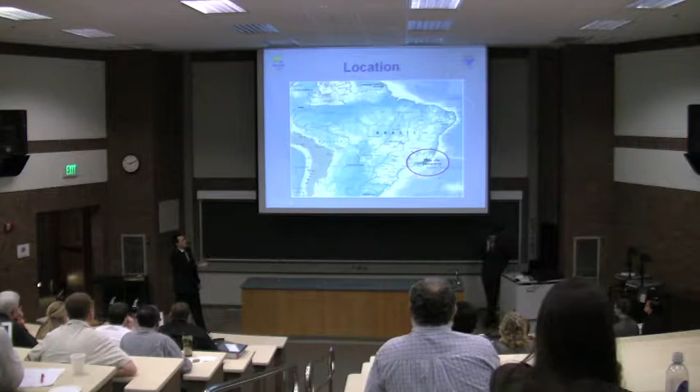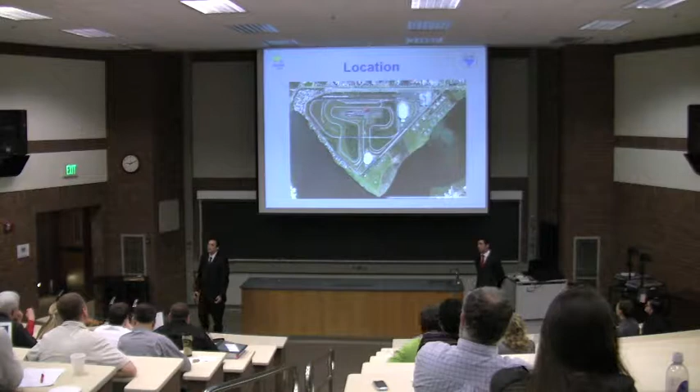The city is going to have 4 sites of competition: the Barra Zone, the Copacabana Zone, the Maracanã Zone, and the Deodoro Zone. The tennis competitions will be played in the Barra Zone. Inside the Barra Zone, there are going to be many venues for competitions. The Olympic Tennis Center will be located in the Rio Olympic Park. The Rio Olympic Park is going to be constructed on the shore of the Jacarepaguá Lagoon, where nowadays there is a racing track. This vision model, given by the Brazilian Olympic Committee, shows the venues inside the Rio Olympic Park, with the Tennis Olympic Center right on the shore of the lagoon.

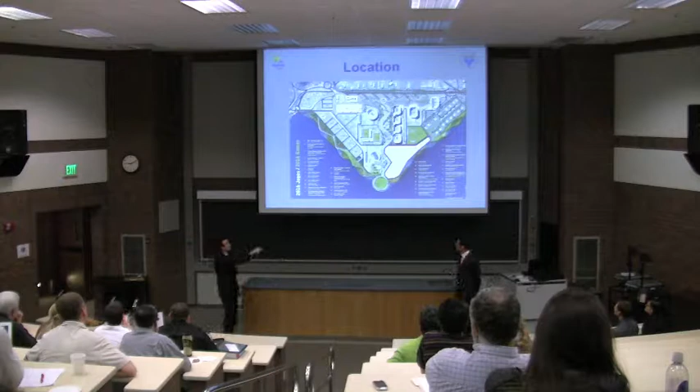Although the Olympic Tennis Center has 3 stadiums and 13 ground courts, the objective of this project is to develop the structural design of the center court stadium only, taking into consideration mainly safety, aesthetics, and economical characteristics. The stadium must have 120 feet by 60 feet clear space at the center, which is the minimum area needed for the court.

It's also required by the Brazilian Olympic Committee that the stadium must have a capacity for at least 10,000 seated spectators. Regarding the structural analysis and design part, our steel frame design followed the provisions given by the American Institute of Steel Construction. Our concrete frame design follows the ACI Code 318, which is given by the American Concrete Institute. And our loadings are based on the International Building Code and the ASCE 7-05 Code, which is given by the American Society of Civil Engineers.

The Brazilian Olympic Committee defined a budget for the construction of the entire Olympic Tennis Center, but they did not specify how much of that money would be directed to the construction of the center court stadium only. Therefore, we analyzed several different aspects of the facilities, such as their capacity and importance for the games. And we also got information from Brazilian specialists in stadium construction, and we came up with a budget of $25 million for the construction of the center court stadium only.

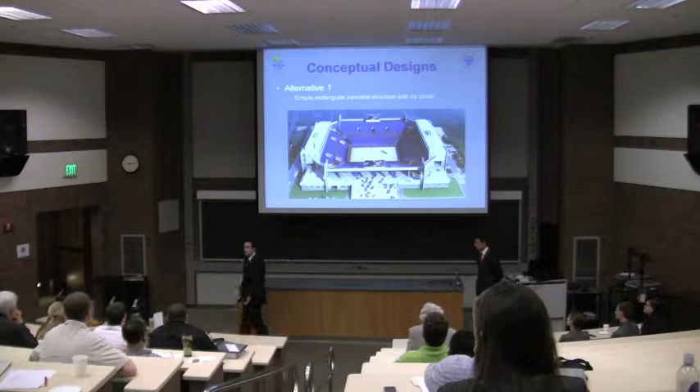After the problem statement was defined and the limitations and constraints were stated, we generated 4 conceptual designs in order to find the best design to go with in our project. Alternative 1 is a simple rectangular concrete structure with no cover for the stands or roof for the court. Alternative 2 is a rectangular steel structure with rounded corners, concrete grandstands, a partial cover for the top level of seating, and an external illuminated glass finish on the outside of the stadium.

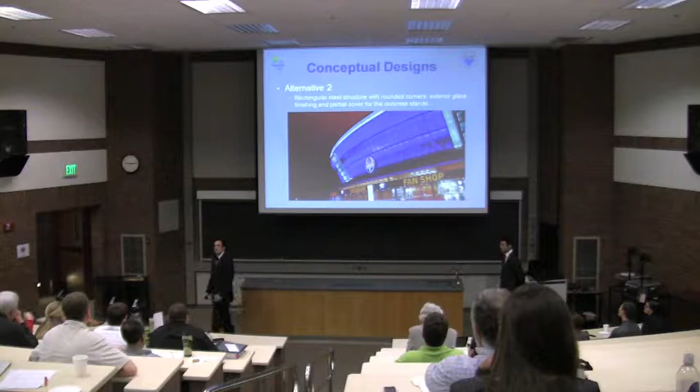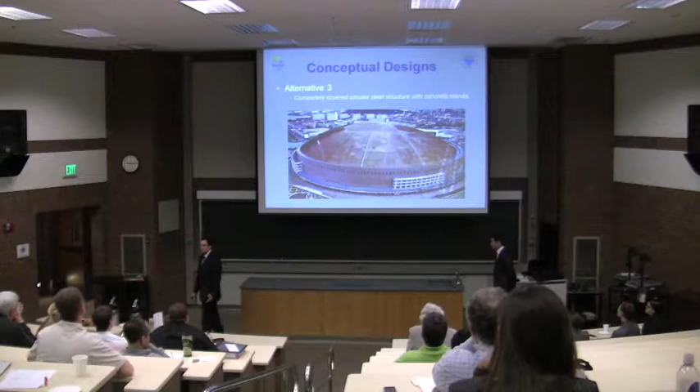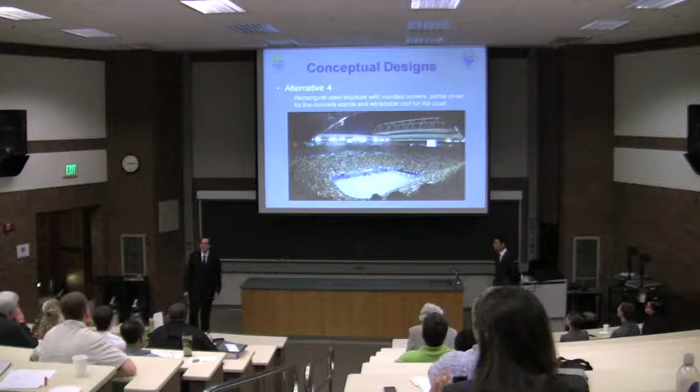Alternative 3 is a completely covered circular steel structure with concrete grandstands. Alternative 4 is a rectangular steel structure with rounded corners, concrete grandstands, a cover for the top level of seats, and a retractable roof that can be closed in 20 minutes in case of rain or strong winds. In order to compare the alternatives, we generated a table with the characteristics of all the alternatives. This table has characteristics such as shape, stands material, cover, cost, maintenance cost, and many others.

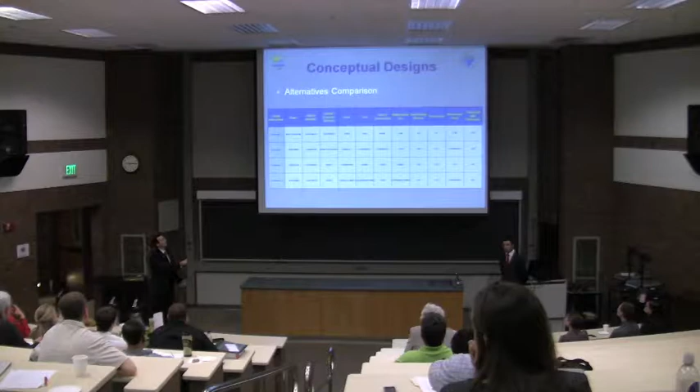In order to find the best design to go with in our project, we made a decision matrix where we rated the design goals from the most important to less important, giving a weight factor for them. In each design goal, we rated the alternatives from 1 to 4, 1 being the worst and 4 being the best for that design goal. Then, we multiplied the value from 1 to 4 we gave in each design goal with the relative weight factor we gave for the goal in order to get a final result for each alternative. The decision matrix shows us that alternative 2 was the best one to use in our design. It got a value of 1,740.

Then, using a software called Autodesk Maya 3D, we generated an architectural model of the entire complex using alternative 2 as the center court stadium.

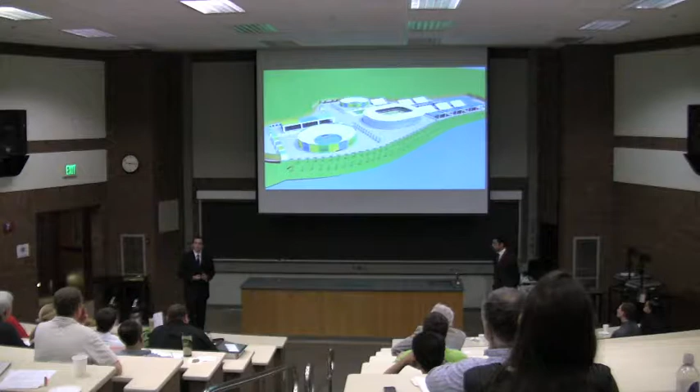The Brazilian Olympic Committee proposed the Olympic Tennis Center to have a center court stadium with a capacity for 10,000 seated spectators. A Court 1 stadium with a capacity for 5,000 seated spectators. Fast food concessions and stores for the public to have comfort while they're watching the games. A Court 2 stadium with a capacity for 3,000 seated spectators.

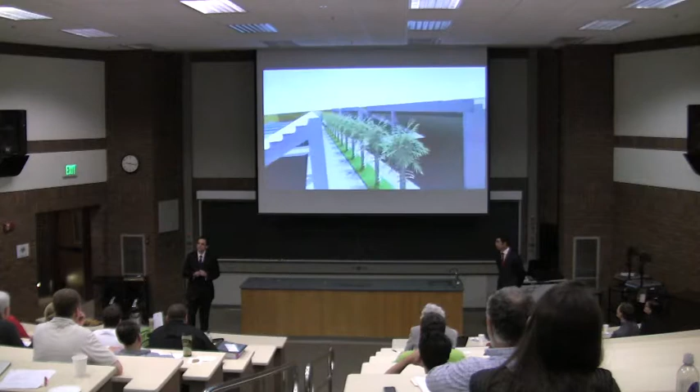The less important games of the Olympics are going to be played in 6 ground courts that have a capacity for only 250 people. Finally, the complex also has 7 practice courts for the players to practice before the Olympics start and for them to warm up before their games in the Olympics. As it was said before, the Olympic Tennis Center is located right on the shore of the Jacarepaguá Lagoon.

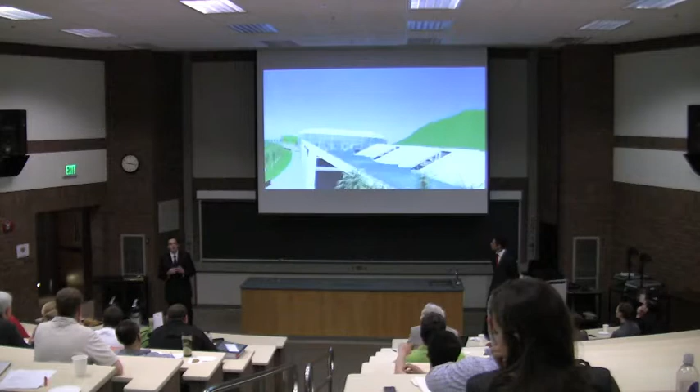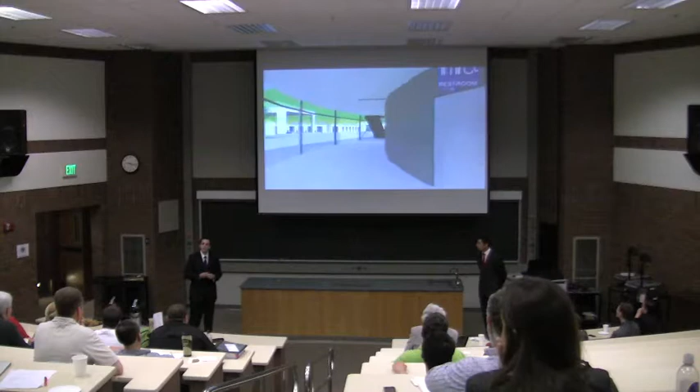The service area of the center court stadium has mainly 3 floors. The public will access the stadium through the doors in the glass and then walk through the corridors in order to get to their seats. The first floor is focused on the players. It has the players' locker rooms, trainers' room, press conference room, and press mix zone.

It also has restrooms and concessions for the public, but the public will have to go through stairs and elevators to get to the 2nd and 3rd floor in order to get to their seats. The 2nd floor has the access for the media center, for the media journalists to broadcast the games to the world. The 2nd and 3rd floor have concessions and restrooms all around for the public comfort. In order to get to their seats, the public will have to go through 12 corridors, 6 located in the 2nd floor and 6 located in the 3rd floor.

In order to get to the capacity needed for the stadium, we generated a capacity calculation that gave us the value of 30 rows needed in the grandstand in order to get to 10,000 seats. We divided the 30 rows into 3 sections. The first section with 5 rows of blue chairs, the second with 10 rows of yellow chairs, and the third with 15 rows of green chairs. The media center is going to be located in between the 2nd and 3rd level of seating, behind the dark tinted glass for them to broadcast their games in their press box.

The 3rd level of seating is protected by the aluminum cover, which is supported by a system of steel trusses. The steel trusses are supported by the exterior columns of the stadium. The final height of the stadium was calculated to be 72 feet tall, due to the rise of the steps to the grandstand, the floor for the media, and the safety height needed for people not to access the truss. The top view of the model shows the distribution of the courts in the Tennis Olympic Center.

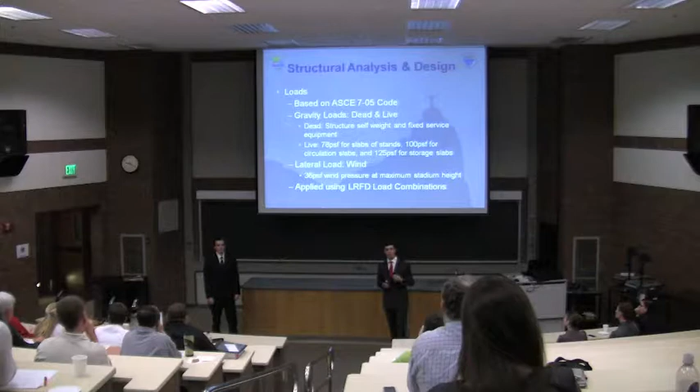The code specifies a live load of 60 PSF for the stands area, 100 PSF for the circulation areas, and 125 PSF for the light storage areas. We further increased the 60 PSF load for the stands area by 30% to account for impact loads that might be caused by the spectators. And that's why you see the 78 PSF value in this slide. The code also has a procedure to calculate the wind pressure that must be considered. Therefore, we performed all the calculations and we found that value to be 36 PSF at the maximum elevation of the stadium. Then, all those loads are applied to the analysis and design using the load and resistance factor design load combination.

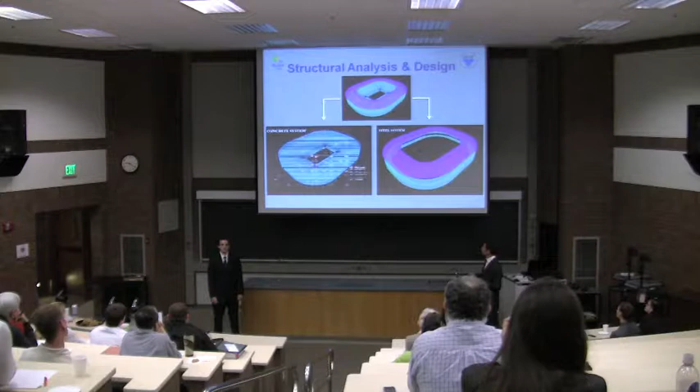So take a closer look at the concrete system. In this figure, all the beams are represented with a letter B and a number, all the slabs with a letter S and a number, and all the columns with a letter C and a number. How the system works is basically the gravity loads are applied to the slabs, which transfer the loads to the beams, which then take them to the columns, which then take them to the foundation.

The steel system, on the other hand, receives both gravity and lateral loads. For the gravity load, there are two cases. The first one is the gravity load coming from the roof. That load is transferred to purlins that are connecting the trusses. So the purlins take the loads from the roof, take them to the trusses, which then take them to the exterior columns, which then take them to the foundation.

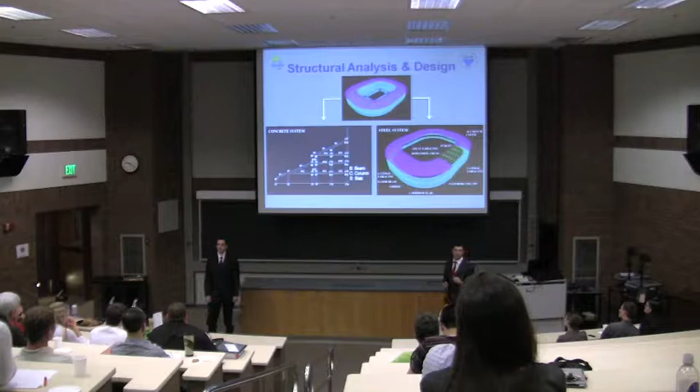The second case is the gravity load coming from the corridor slab. That load is supported by a system of floor beams, which are supported by girders. So the girders take the load and transfer them to the exterior columns, which again take them to the foundation. The lateral wind load is directly resisted by X-bracing systems that are symmetrically placed in both the short and the long direction of the stadium.

The concrete system design was performed by hand by taking into consideration the critical member of each group and then designing for that member and using that design for all the members in that particular group. One of our main concerns while performing the concrete system design was to find the optimum solution between the labor cost and material cost. Since labor costs are usually higher than material costs, we tried to minimize that as much as we could, although that might have increased the material cost at some point.

So in order to do that, we tried to use the same sections as much as we could, and when we had to change the section, we tried to maintain that as similar as possible to the one that we already had. We also limited the steel reinforcing bar numbers to 5 sizes only for the entire stadium.

The beams were all designed as simply supported, and they were designed based on flexure, shear, and deflection criteria. So, following the same logic, we defined all the beams to have rectangular cross-section, and once again, we limited the steel reinforcement bar sizes to 4 sizes only in this case.

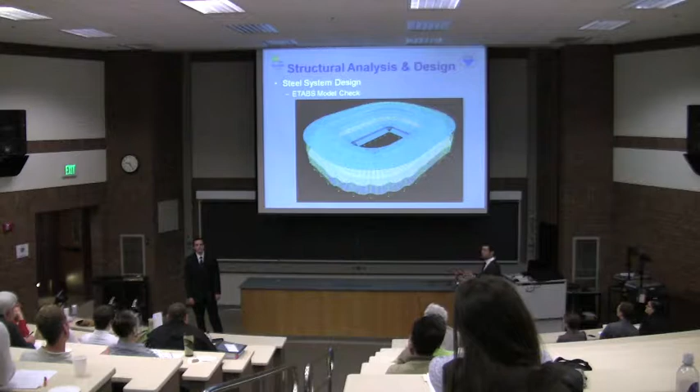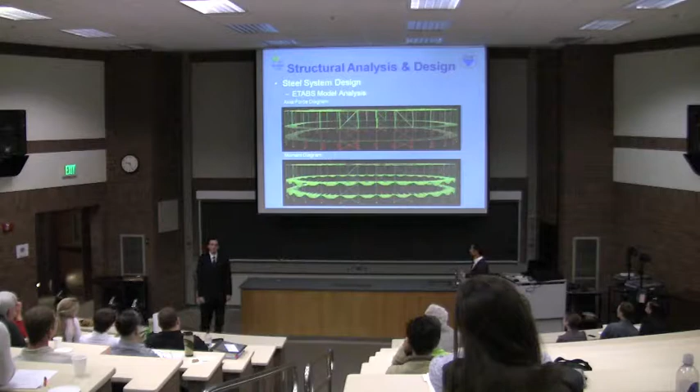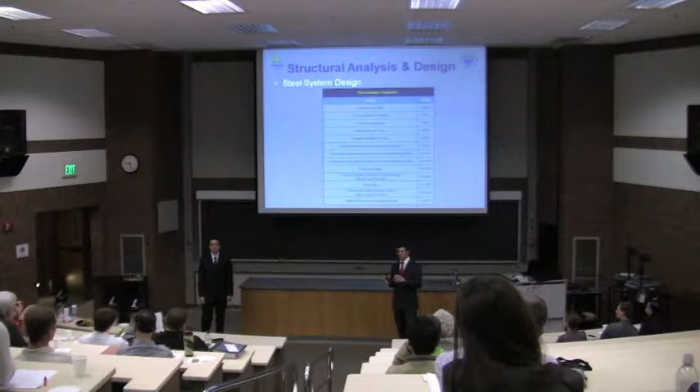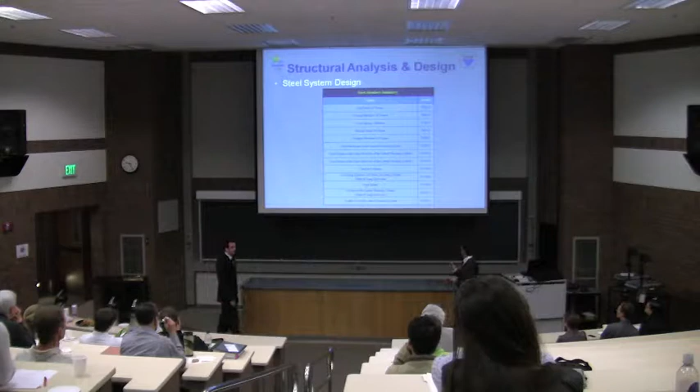So now that we knew the forces and we knew the stresses in each of those members, we then divided the steel system into 13 groups. And then we analyzed each member of that group, and we found the critical member for that particular group. So then ETABS gave us the smallest section that could be used for that member. Then we took that section and we used it for all the members in that particular group. So as you can see on the table, all the groups have only one unique section assigned to them, and they're all W sections.

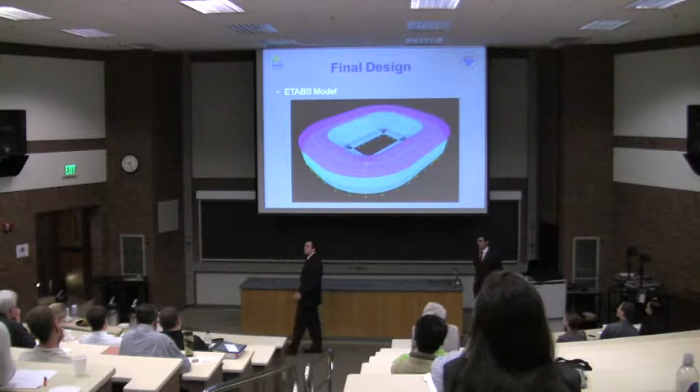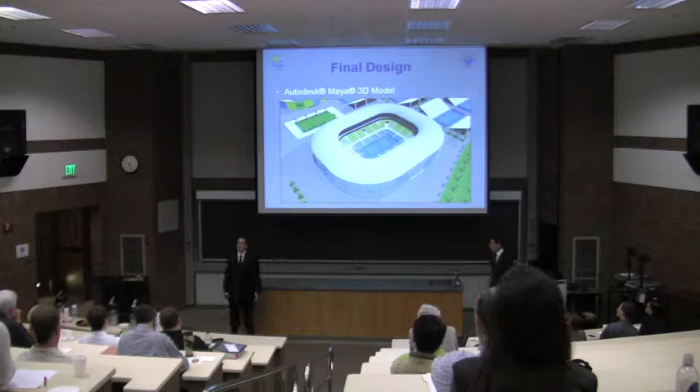The final model given by the ETABS software shows the concrete and the steel system working together. The final rendered image given by the Maya software shows the final architectural model of the center court stadium.

In order to get to the cost of the structure, we used the help of the Brazilian specialists in stadium construction. They are currently working on the stadiums for the Soccer World Cup that is going to happen in Brazil next year. To get to the cost, we needed to find the quantities of all materials in the stadium, member by member of the structure. After we found the quantities, we used the Brazilian prices for materials in order to get to a final cost of materials of around $8 million.

With the experience of the Brazilian specialists in stadium construction, we found out that usually in a Brazilian stadium, 45% of the cost of the structure is material cost, and 55% is labor cost. So we got a final labor cost for our structure of around $9.8 million. So the final price of our structure will be around $18 million.

To conclude our project, we found that the structure design is safe and complies with the required building codes. The final capacity of the stadium was found to be 10,568 seated spectators. The final cost of the structure was found to be $18 million, which is under the budget we have of $18.75 million.

The structural system is a combination of reinforced concrete and steel. And finally, we found that the stadium is feasible to be constructed by 2015. We found that with the help of the Brazilian specialists in stadium construction.

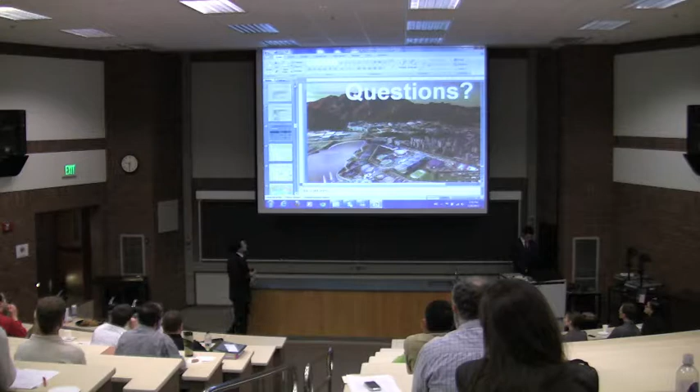So for the safety, the alternative one, since it doesn't have any cover or anything, we consider it being safer than the other alternatives, since the roof cannot fall onto people, so it's a safer structure, having less complexity on it. For example, the alternative 4, we found out that it might not be safe because of the retractable roof. It could catch on fire or something like that, so because of the mechanism, it could be less safe than

the other one. So it's not that the structure wouldn't be safe for people to use, it's just to consider the difference between each other, being less or more safe than the other. But all the designs will be safe, as in the structure is safe for people to use.

Now, public acceptance, how do you do that? Because the Olympics is in Rio de Janeiro, which is a city with nice weather, we think that the public will not accept a stadium that is completely covered. Because people like the weather of Rio and they like to enjoy having the sun and everything. So we thought that because of that, the public wouldn't accept.

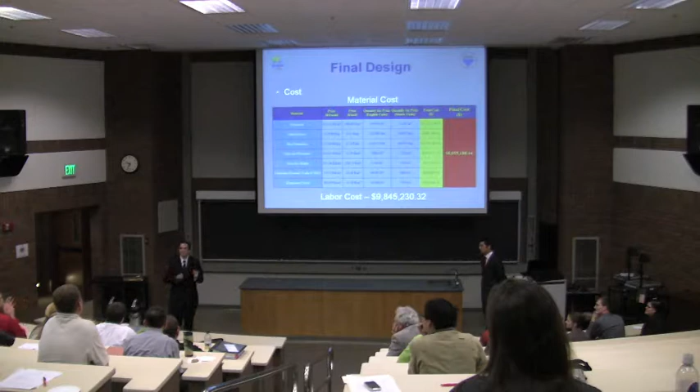You see, it is over $9 million and 32 cents. I mean, it's not possible that accurate. The material cost is exactly that cost. That's the cost of materials one by one. The labor cost, my point is that when you make the presentation, you have a figure like 9 million. You really don't want it to be 32 cents. Okay. This was based on the materials cost. That's why we did it, but I just said around 9.8 just to make sure.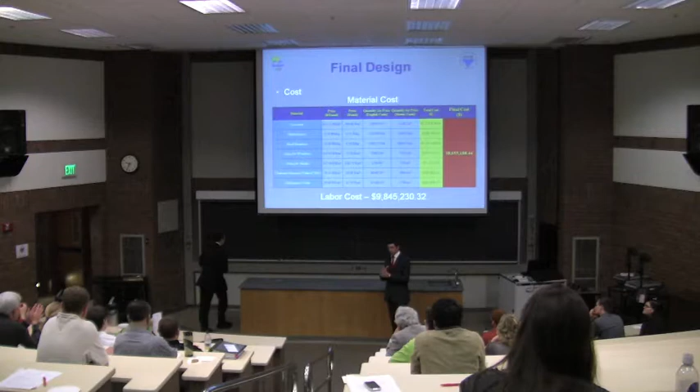Does the code have anything built into it, the fact that it's by the water? You have the wind load there based on elevation, but certainly the wind must be different. Yeah, based on the location. The code does take into consideration if it's an open area, what is around. And we have all the calculations actually for the wind load.

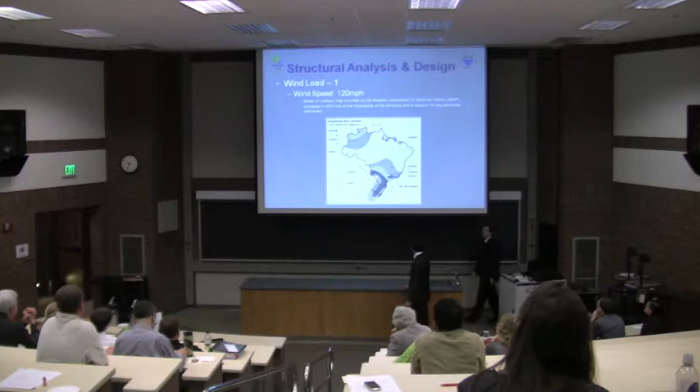And so it does take into consideration where your structure is located. So here, for example, first we found the wind speed in the region in Rio de Janeiro. Then you see all these factors, Kz, Kzt, Kd. These are all based on the code, and it varies depending on the location of the structure. It's an open area. It does not say specifically if there's water on the side, but it takes into consideration what it is.

Yeah, and my other question, does it do anything for material because it's by salt water or something like that? No, we did not think of that. The water here is not actually the ocean. It's a lagoon, so it's not as big as it's shown. Okay.

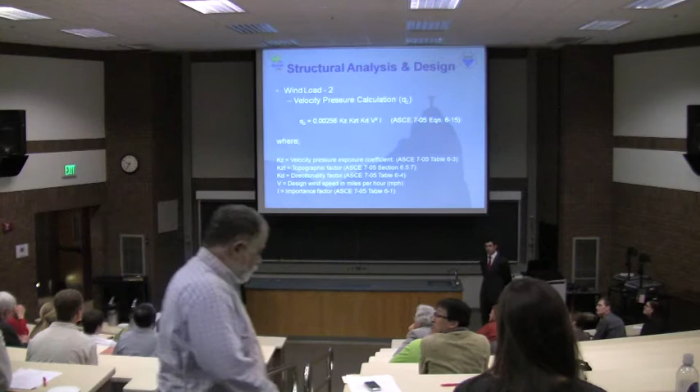Other questions? For the rendering software that you use, how did you learn that, and how much time did it take you to finish this? Well, I took an extra class besides my major here just to make the architectural model with Andres Montenegro. And it took around 6 hours a day, working 5 to 6 days a week to do the architectural model. And the animation took me at least 3 weeks of working 5, 6 hours a day with the Studio M crew.

Yeah, for that final budget, the first one you had in 2008 dollars for 25. Was that final one $18 million in 2008 dollars? Yeah, that's in 2008 dollars because it was evaluated by the Olympic Committee in 2008. So it actually could be higher or lower now. So we worked with the prices in 2008 because of that.

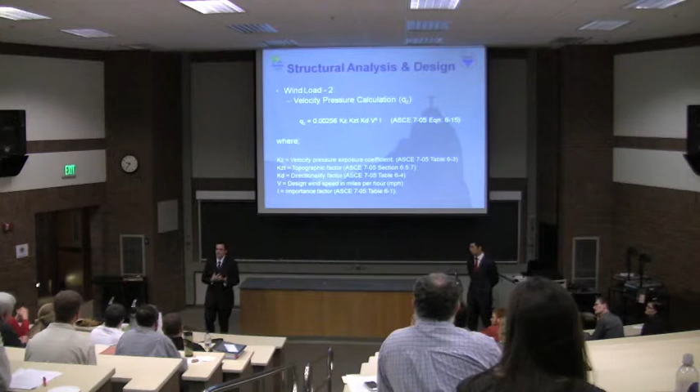If time goes back now, and you know what you know, what things would you do differently and why on this project? In which kind of way? When finding the alternatives, what is the thing you think you would change most if you had to do this project again? I actually like this project a lot.